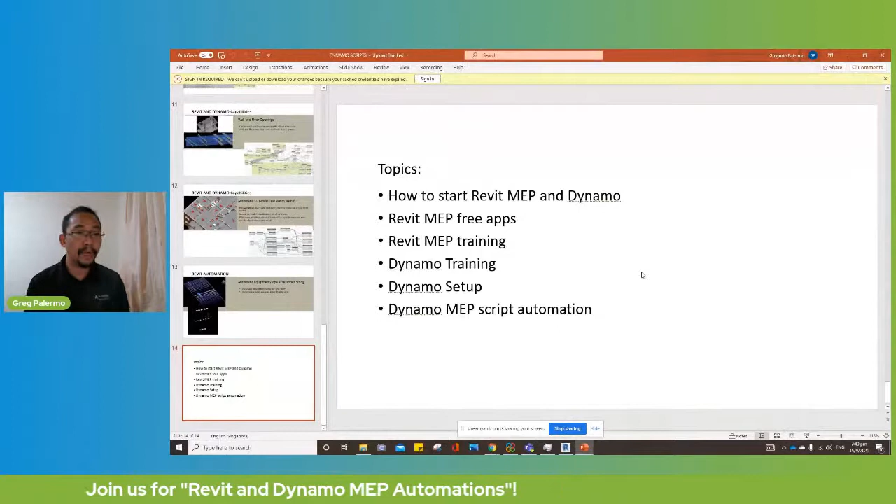Okay, the topics will be simple. How to start Revit MEP - how to start the training in Revit. So if you are new modelers or designers who want to learn about drafting and Revit or AutoCAD, we can cover this topic here on Revit MEP.

We'll also cover this - of course you must also master the families and templates. Then for Dynamo training also, this will be like LinkedIn - mostly all my trainings I mastered or watched through LinkedIn Learning.

Next topic will be Revit MEP free apps. So we have some free apps here, as you can see. This is my personal computer, it's not installed yet here, but I will show you all the free applications that we are using.

Next will be the Revit MEP training. For the trainings, you can use LinkedIn Learning. Most of the trainings I start there, but the training also will be on the work experience itself. So the more you use Revit and AutoCAD, the more you will gain knowledge and experience in this industry.

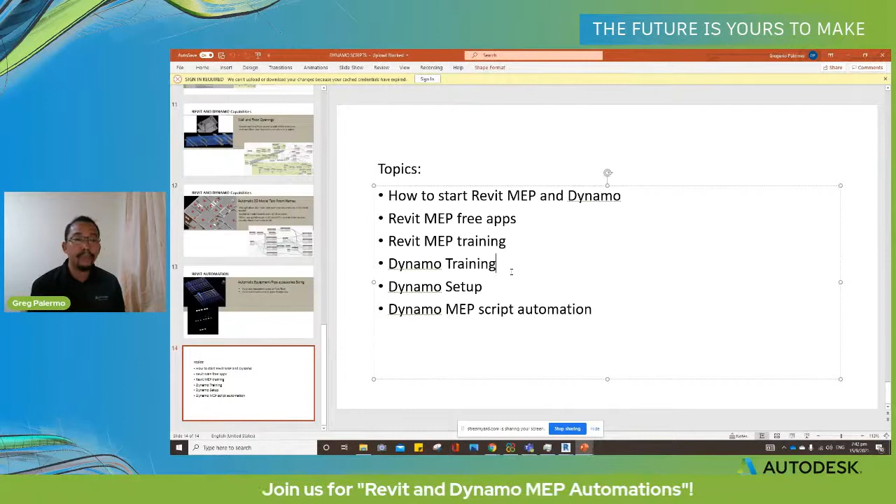Next will be Dynamo training. So how did I gain my skills or knowledge in Dynamo? Again, I go to LinkedIn Learning and finish all the courses there, all the Dynamo training. Then eventually I go to the Dynamo BIM site also to download all the scripting and integrate it into my process.

Next will be Dynamo setup. So how can you start with Dynamo? How you can install this one, then update and uninstall the older version. Also, you download the packages and settings for the manage node packages path. So this will be the course and the topic.

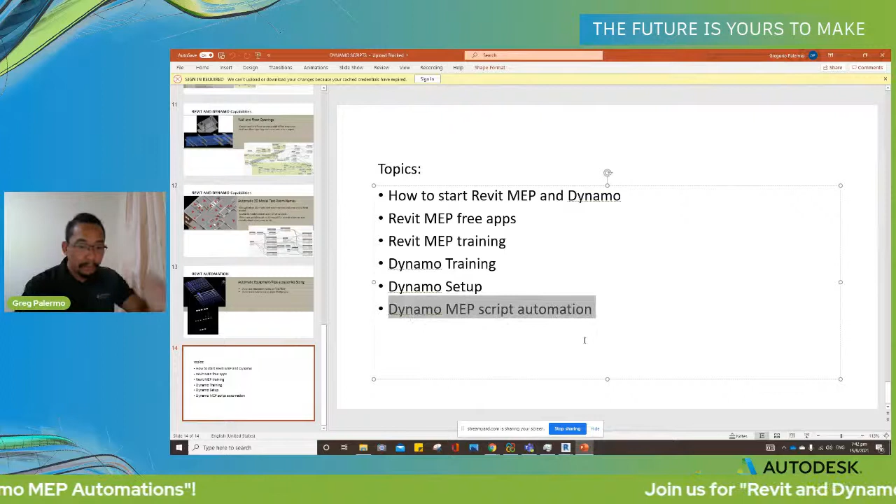Next, the last one will be Dynamo MEP scripting automations. So I guess I will show you the scripts here that I created, and some of it I already downloaded, copied, then checked and practiced, and eventually applied into my process.

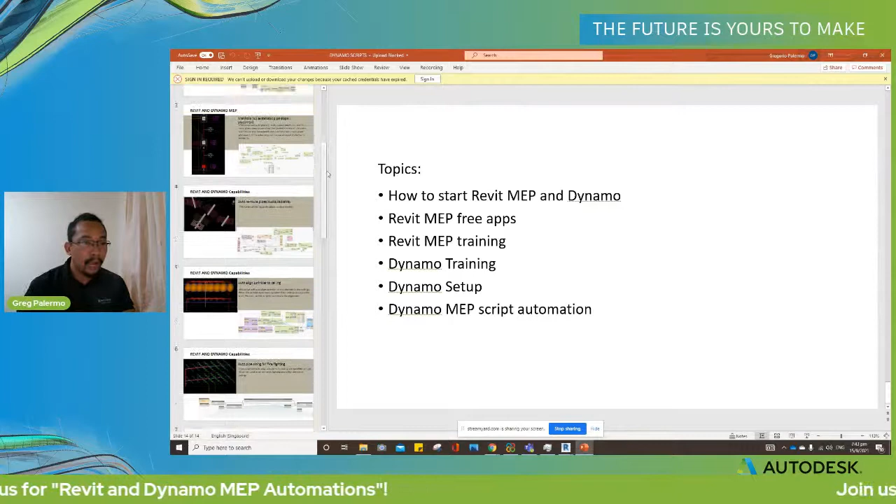So I will just show you this one. Let's start with these slides. These are the tools that I'm using. This is free - PyRevit, Rushforth also.

This one has a 1 month free trial in Revit, so you can download this one. You just type, for those who do not know yet, you can type here 'Revit apps', enter, okay, and go here, and then you can download all the applications here. So Rush Publisher, type here, like Rushforth. This one has a 1 month trial.

You can also try the roots here. This one is also free, no fee. It's free, you can download this one. We will cover this one later.

Then we have Microdesk also. I did not install this in my computer, but you can only install this one in the lower version like Revit 2018. You can install this application. What does it do? It will auto align pipes, especially slope pipes - it's a little tricky to align in 3D, but this one can align in Microdesk. It will also automate the creation of pipes in 3D, so you can create a pipe in whatever position in the 3D of the fittings. So this is mostly my used applications, free applications.

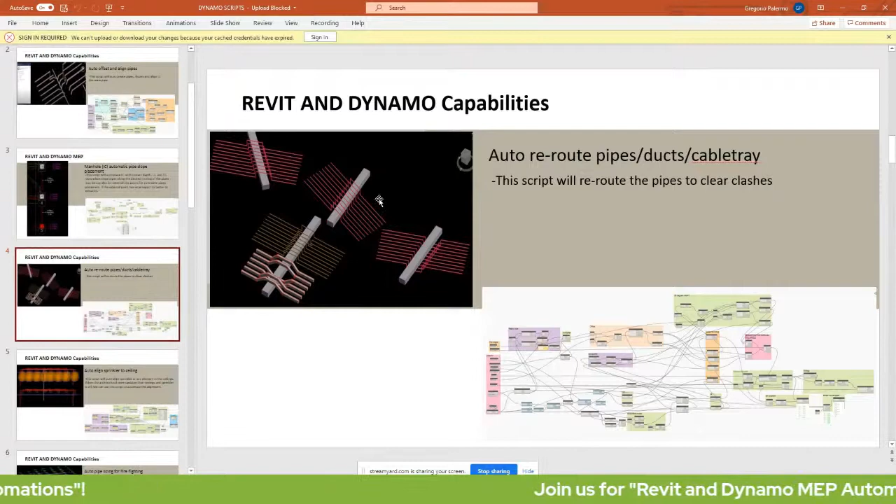Next will be auto align sprinkler to ceiling. So if you have multiple sprinklers, and the architectural changes the ceiling height - maybe in one room they have multiple ceilings - when you run this one, automatically the sprinkler will align to the ceiling.

So next, this one is my first Dynamo script that I created personally - automatic pipe sizing for fire fighting.

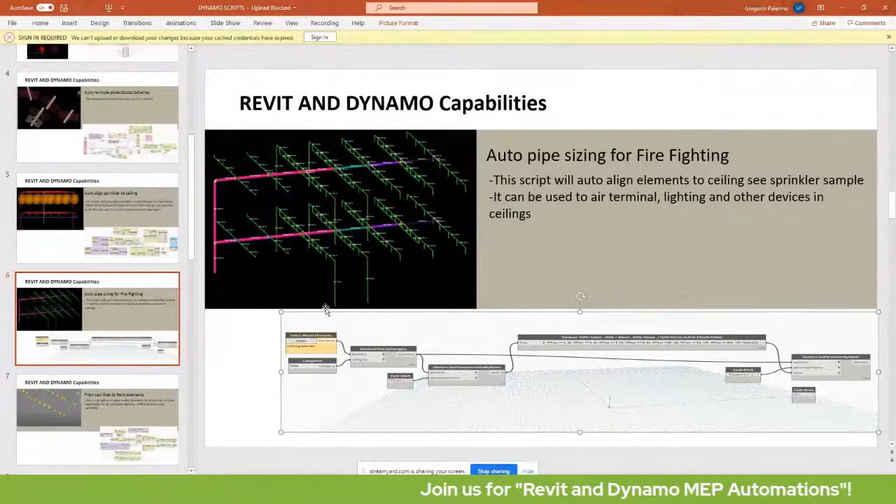This one will save time because normally once you place all the sprinklers, draw the pipe, all the branches and the main pipe, then you select each branch to size it in Revit. But with this script, no need to do that - you just run it. As you can see, the script is simple already, not complicated. I will give the script and a link, maybe in box.com, so you can practice and apply this directly into your project.

Next one - if you have points in AutoCAD, let's say already marked up from an old drawing, and they want to complete the drawing in Revit, this script will place all those elements in the ceiling. If you have the CAD points, the center point or line, it will convert those lines or points into an element that you decide in the project - sprinklers, air terminals, lightings, all those elements in the ceiling.

This one is for electrical also. The engineer asked me if we can auto-generate placement of wire size inside the cable tray. So let's say you draw a cable tray, then you have a number of wires to place there. Of course you have to select the parameter, so you can automate placement of all the wires inside the cable tray, whatever the size, how many wire sizes fit. In electrical, I'm not an expert, but there's minimum or maximum size per cable tray, per width and length.

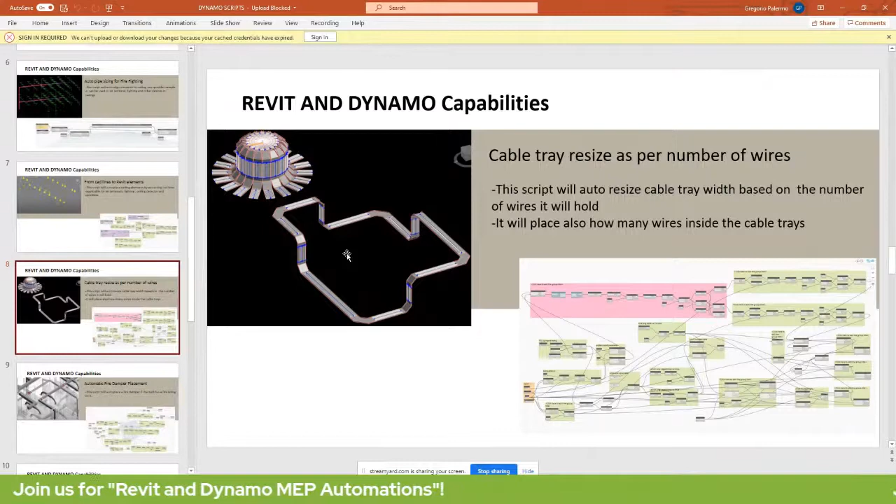This one I downloaded only from the Dynamo BIM site, so I can show you that website too. It's important that you know all those websites. So Dynamo BIM - I have it here. You just type here. This is important - I download and search all the scripts and integrate them into my process in MEP. So you just type here, let's say fire damper, and that's how you integrate and get free scripts already.

So this is the process I'm doing - fire damper, you just select here, maybe this one. Sometimes they have a script link for this. I don't know if it has a link - you download this one. I don't know, this is the family. So the script will sometimes be like this, then maybe you just screen capture and work in Dynamo, placing all this - you just copy it.

The way to master Dynamo, to learn it, is to practice it. Without practice, you just watch in, maybe LinkedIn Learning, all the Dynamo tutorials - you will not learn. You must open Dynamo and practice placing all those nodes. That's how I learned my experience, my skills in Dynamo.

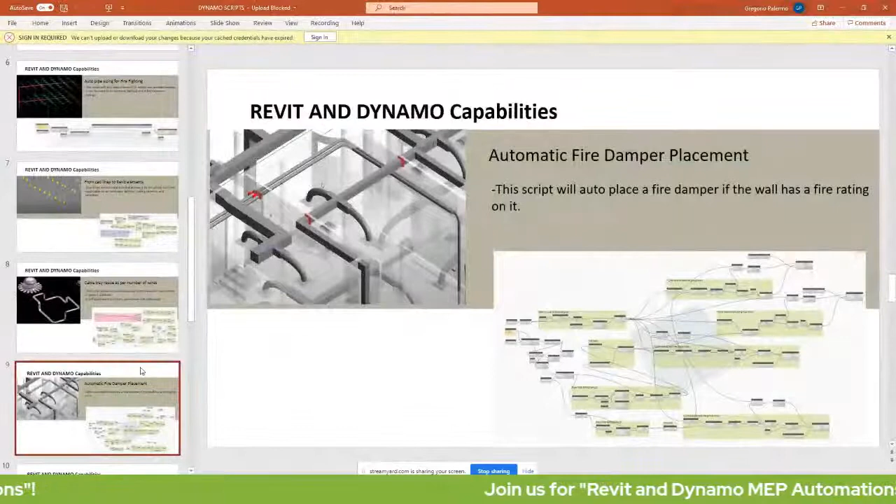Okay, go back to the topic. Let's finish this one - again for electrical, but I created this also. This process, let's say you have a dB and dP value. In Excel you have two columns - information of all the electrical circuits schedule. Let me zoom this one. Let's say in Revit you place already these two pieces of information - DB8 and DB6. You have already placed this.

In Excel, when you run this Dynamo automatically, you don't have to input all this information, SP, 10A, all that - it will auto-populate based on the matching of these two parameter information. We tried this already, it's working. I'm not sure if I'm clear, but if you have two parameter information that matches, the rest of the information in Excel will get that and place it into Revit. So it's like matching and then getting the rest of the information into Revit.

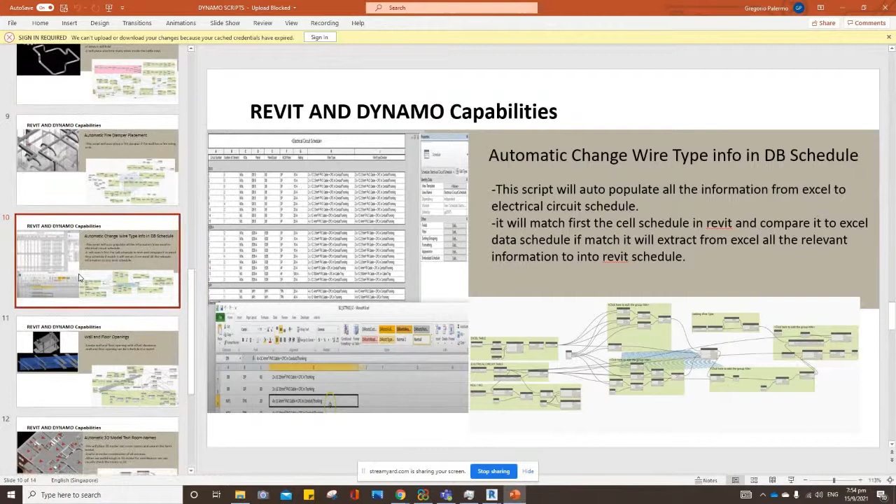Sometimes it's difficult to explain the whole process in Dynamo. Even if I'm already doing it, it's better to actually do it, to practice it, rather than to explain it - sometimes it's really difficult to explain.

Okay, next will be this one. I also downloaded and then updated and integrated all the parameters and information from the Dynamo BIM website. Then I created my own version of wall openings and floor openings.

The advantage of this one is that when you have a shared coordinate, it's not exactly center to center or origin to origin. Let's say your building architecture Revit model is slightly moved or in different coordinates, when you run the script, it will still go there and open the correct openings. Because I already tried the simple one I downloaded from the internet, and when the coordinates are moved or in a different position, the opening will not follow.

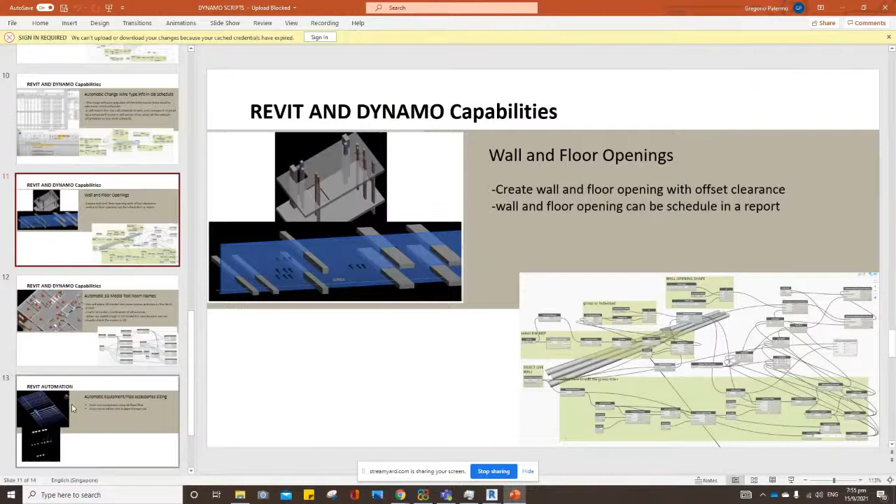So that's how you can improve or progress your script. Once you download the script, it's not finished already. There are times you encounter a problem, then you have to work on it, develop it, and eventually you reach a certain point where it's already okay and you can work with it.

So this one is basic, no? For Revit Dynamo automatic 3D model text room names. This one is an advantage in Navisworks. Let's say you want to walk in the room, it will not be in the normal process if there are no 3D text in the room, you cannot see what room that is.

You just check the manual, the PDF for that floor plan. But if you have a 3D room text, then you open it in Navisworks, you can see the room itself, placed in the floor and walls. So when you do a coordination meeting, you can see what room you are talking about as you walk through in Navisworks.

Okay, next, so this one is not Dynamo, this one is basic Revit. You can automate Revit sizing of equipment, air terminals, and let's say VAV or mechanical equipment like fan coil units. If you have the correct or perfect system flow in your project, then Revit, without using Dynamo, will auto size those equipment and air terminals. You just input the correct flow, then the air terminals and equipment will auto size. No need for Dynamo scripting for that. We will cover this one in the next topic.

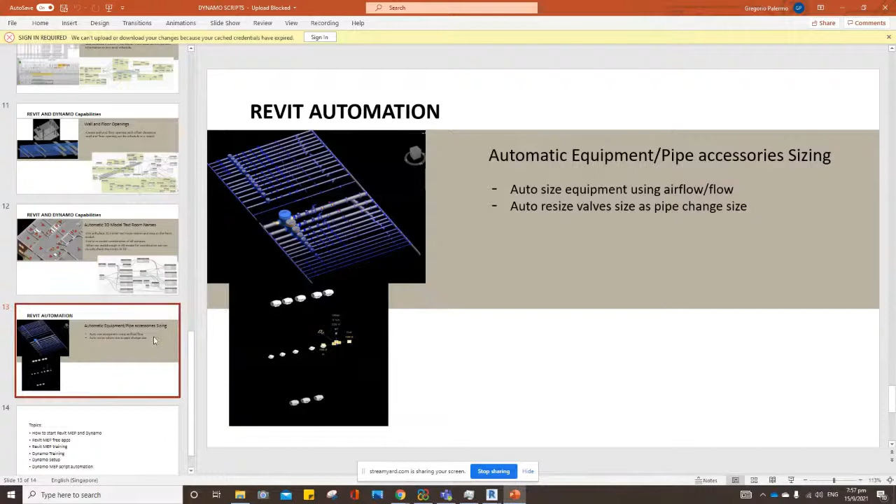Okay, so I guess I explained already the scripting. So let's go back here to how to start with Revit MEP and Dynamo. So far, any question?

To the... okay, let's continue.

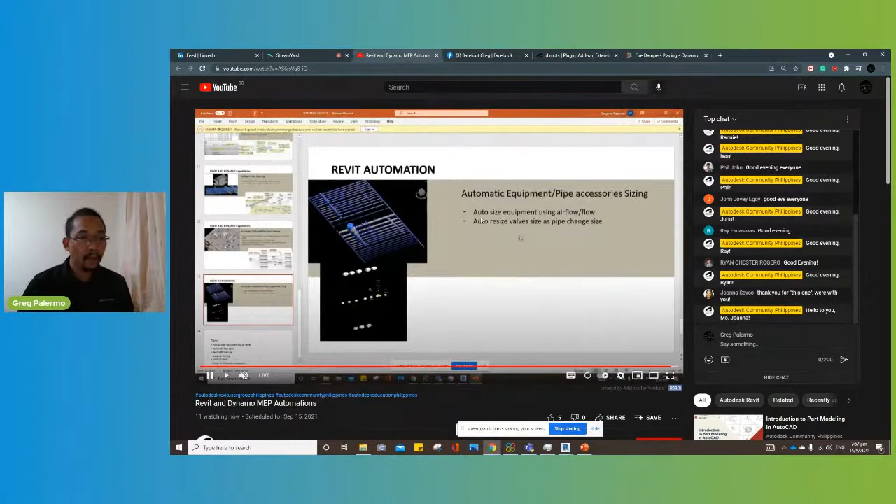Okay, so I will just open this one. How to start Revit, MEP, and Dynamo. Okay, let's go back here. So again, I guess we already have a LinkedIn profile or account, right?

So what I did, besides working in Revit modeling and AutoCAD, you must also start learning to gain more knowledge, because from my experience, only a handful of companies do trainings in Revit MEP. So if you want to learn or advance your skills without an expensive fee from a mentor or training site, you go to LinkedIn Learning to improve your Revit MEP skills and Dynamo also.

In Dynamo, in LinkedIn Learning, I think the subscription is more or less 1,200 pesos, or 25 Singapore dollars per month. That's why, before, when I started, my previous company was fortunate that they provided it, it was compulsory to take all those courses in Revit.

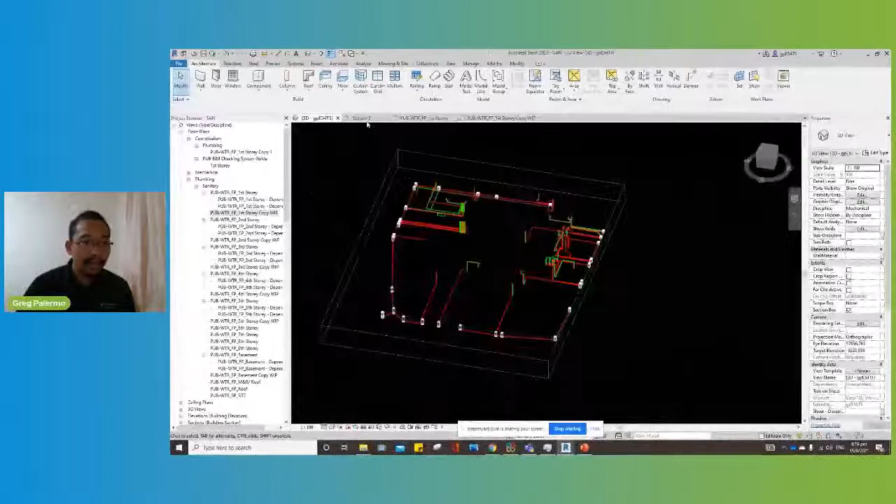Okay, so again, let's now start with the scripting. So Dynamo is not as simple - once you download it, you can already run directly, no. You need to set up also. You must have a template also, the correct template to be able to run Dynamo. So I will show you briefly my template and my families also.

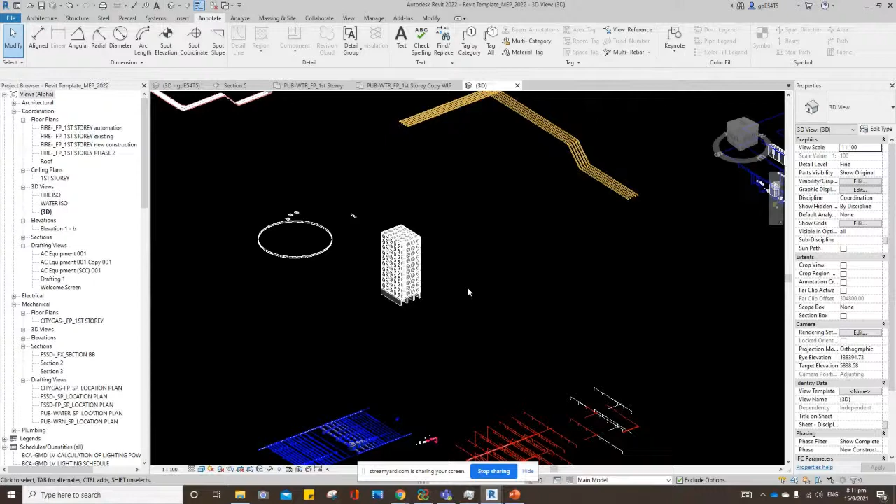So I have all these families here. What I mean is that if you have good families and templates already, then it will be faster for you to model your projects, and then you grab your families. So you don't have to check in the internet, download in the internet. If you have a good template, then it will be easier for you and the rest of the team to model. So I will show you quickly.

So my templates here, for example this one - if you don't have this one, then you do manual, all these bricks here in your template. I mean, this is GRP tank, all these styles. If you don't have the template or family, then you do it manually. It will take time.

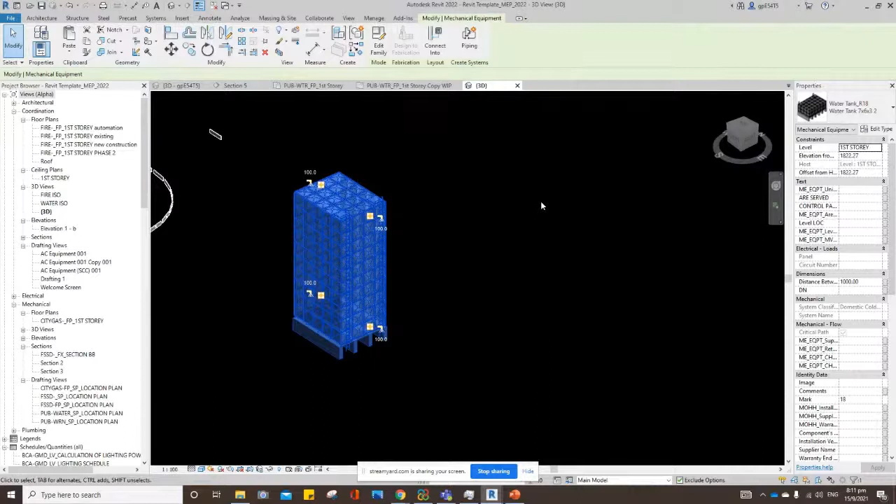Also the formula in this family is integrated also in Dynamo. So that's how I get those scripting, the formula from this family. I have a family - what's it called? Where are you? This one. This is my first family that I created, actually, this one with multiple connections at the back.

The formula here can be applied here, here, here, and also can be applied into this GRP tank. So, as I said, if you don't master the families, then it will be difficult for you to integrate that into Dynamo, because families, parameters, and Dynamo are integrated together. So if you lack all those three, then it's hard for you to run the script.

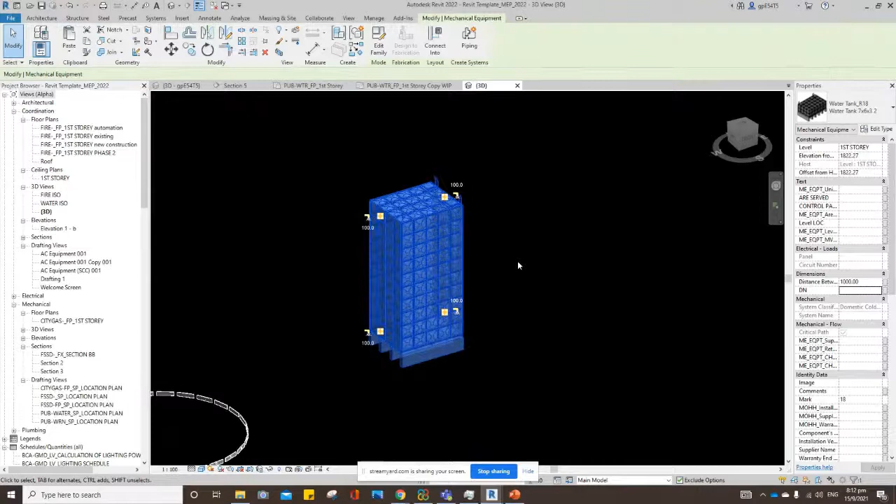So what I mean by that is this is an advanced family that I created. Let's say you want to change this one - let's say the width of the tank will be 2,000, length of the tank will be 4,000, and the height of the tank will be just 5,000, 5 meters.

See, it will automatically adjust based on the parameters or the formula that you created. So, length of the tank, I'll say 2,000, 5,000. Height of the tank, 3,000, 3 meters.

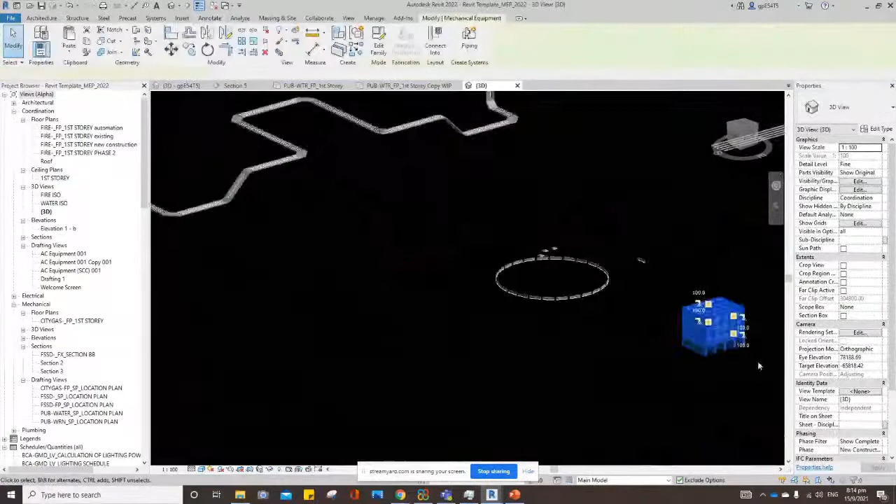Okay, so if you master this one, I can share this family. If you master the script, then it can be integrated also into the air terminal. So the concept of process in the air terminal, this one is the same - the formula that I created is more or less the same. So it started from here, then I can integrate into here.

So now I can create an array automatically. The family will expand, and all those slots will be attached also. It will auto calculate those slots. So let me show you my first script here - my family. This is a side slot linear diffuser, side connection. So I select this one. This is my first family that I mastered.

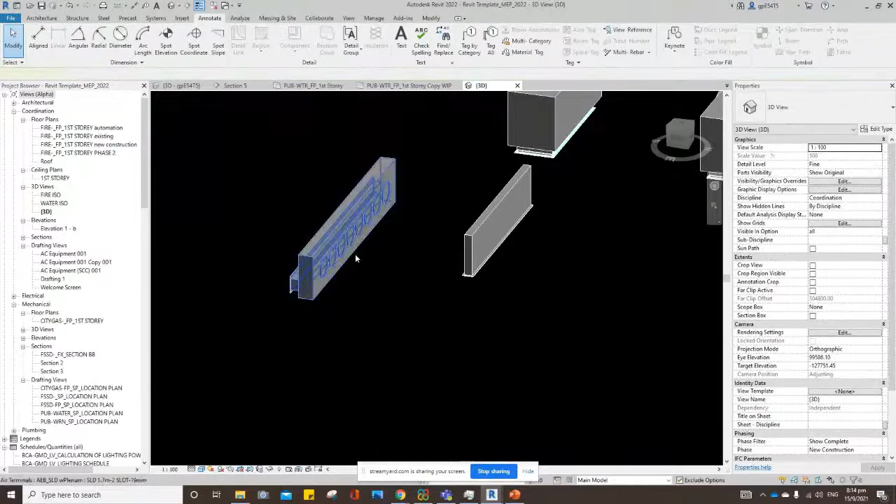So if we go here, if we change the number of connections, let's say 8, it will change also. And then the connector also changes to 8.

Anyway, I will share the family, but not the template because I'm using this one in my company. Another topic: how to customize families. This one is actually from Obayashi Corporation. You can download this one in bimobject.com. But the family I downloaded, the engineer told me that we use a different manufacturer, the Kyudo manufacturer, so it's different. So I customized this one.

So if you select this one now, and you want to change this to 2 slot, it will change to 2 slot. So it's a big help also to the rest of your team.

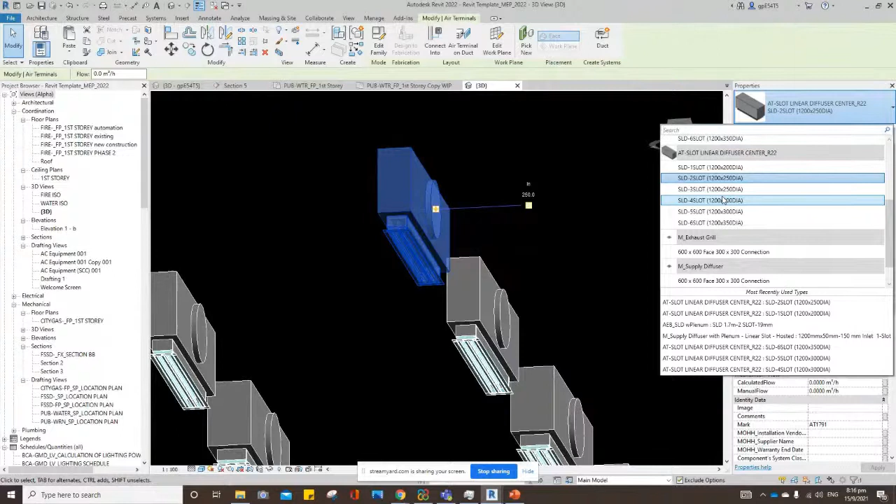If you know this and you are a team leader, you can support them quickly. You already have good families here if you can master and customize this one. So again, you can watch in LinkedIn Learning or YouTube how to create families for this.

So it started from here. Now I can customize most of the families and create those arrays inside here. Sometimes it's already completed from the manufacturer and uploaded on the internet, then you have to customize it to suit your preference or what you want. So that's how you can customize and edit families.

So any questions of families? Anyone? Questions? Nancy, can you see if they have questions there for the families? No, no question. No questions, huh? Okay.

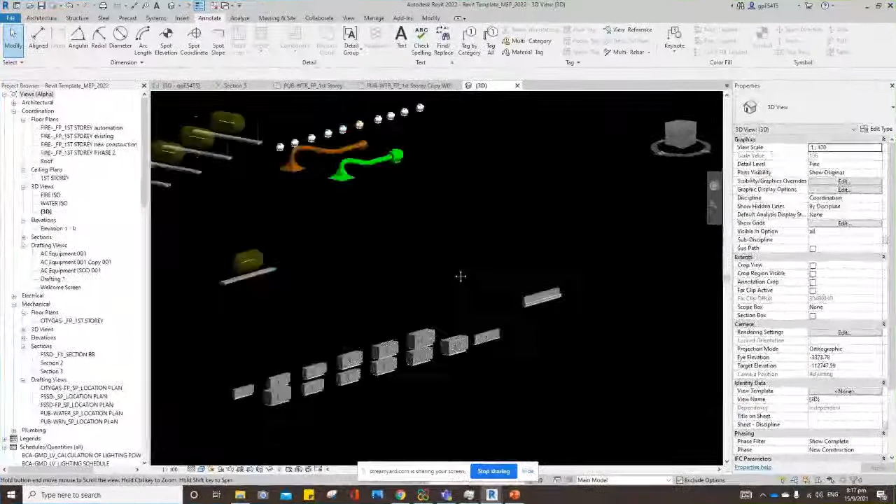Okay, so next one, this will be the automations. We'll cover this quickly. This one is the automation without using Dynamo. So this fan will auto size based on the airflow.

So if I change my airflow here, let's say 200, it will change also. No need to automate manually. So if you can apply the formula here, these dimensions here, you can apply also in the air terminals.

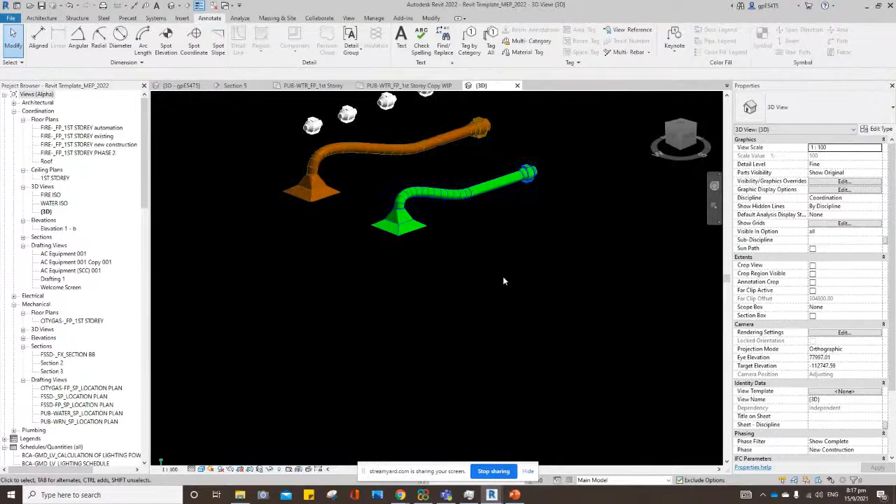So that's how you can take advantage of your automations in Revit only, without the use of Dynamo. So if I select again this one, let's say 400, it will change. Also, let's say I want to change this to 600, it will change also.

So if you can apply this in equipment, you can apply it in air terminals. I will quickly open this one. Actually it's already here, equipment fans, this one. So this one is the lookup table.

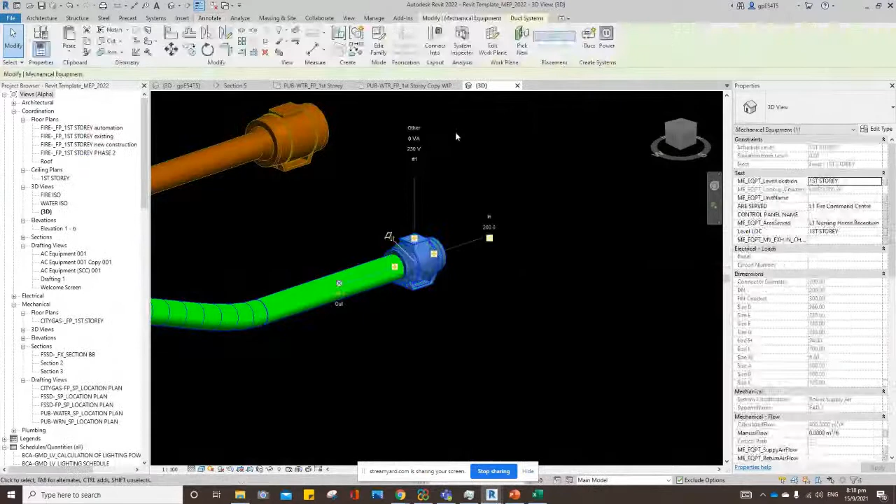So if you have this information, we can automate the sizing of the fans, equipment, FCU, air terminals based on the flow. So this is the lookup table, and if you go back to the family, I can edit this one. Okay, this is the family, I'll just maximize this quickly.

So this is the formula here, and then the lookup table here, this is the one. You just import that, and then maybe you change some of these sizes here. So let's say put the size D, as already mentioned in the Excel lookup table D, then what's already here? Where is it, A B C D, this one, length.

Okay, so in Revit, working in Revit and Dynamo all together is integrated. Its parameters are integrated, you can just link it and get all that information together, and then create a formula.

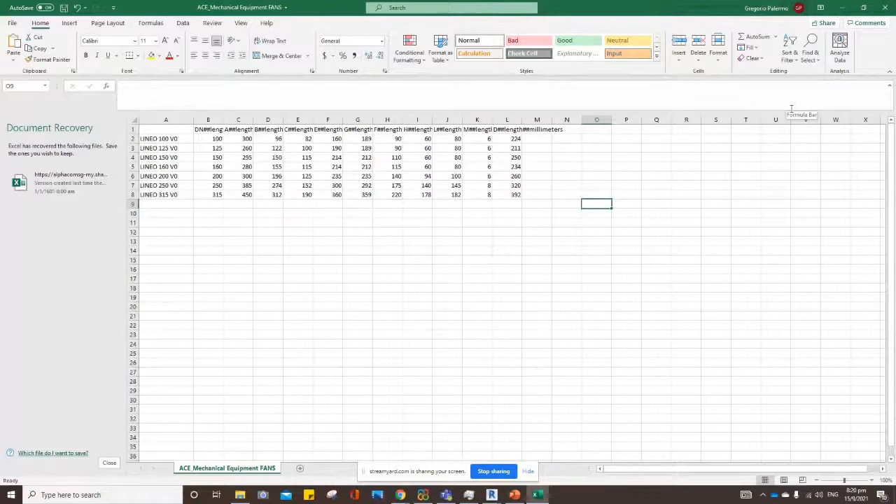So this one also I did not create. I've seen this one in a YouTube tutorial, then I was able to get the family. Then from there I customized it, integrated my process, what I want for this family using a lookup table. So that's how you also integrate that process and automate in Revit for family creation. Okay, I think we're finished with the families.

So no more questions, right? Continue to Dynamo. Yeah, okay, we have... what's the question? I cannot see it. Can you see it?

When creating MEP families, do you prefer to create them as hosted or work plane based or non-hosted? Yes, that's a good question.

For air terminals, I use face based. But for the other type, let's say mechanical equipment, it depends on you. Mechanical equipment will be just a typical generic family. The good thing about generic family is you can select the family and then input the level parameter and the offset, right?

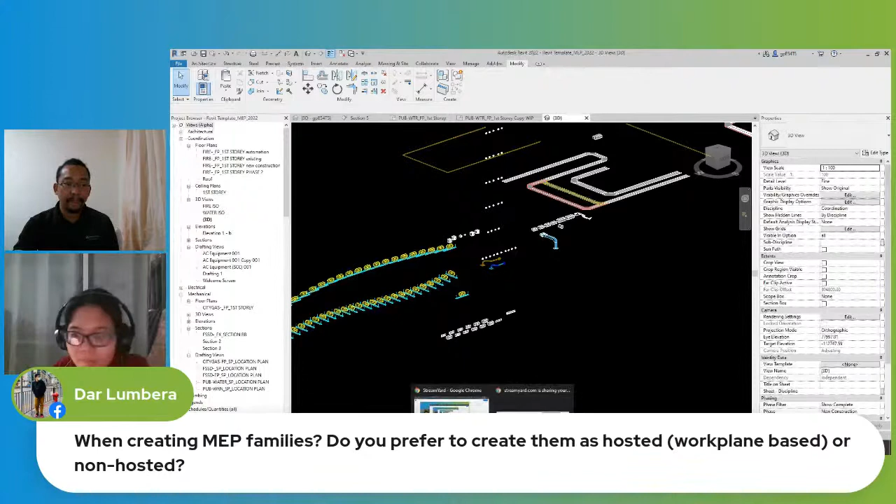Does that family also have a 2D representation? Yes, of course. I downloaded this one as a generic family, then customized it myself. Let's say this one is generic, so you can customize it. I also customized some of the arrows.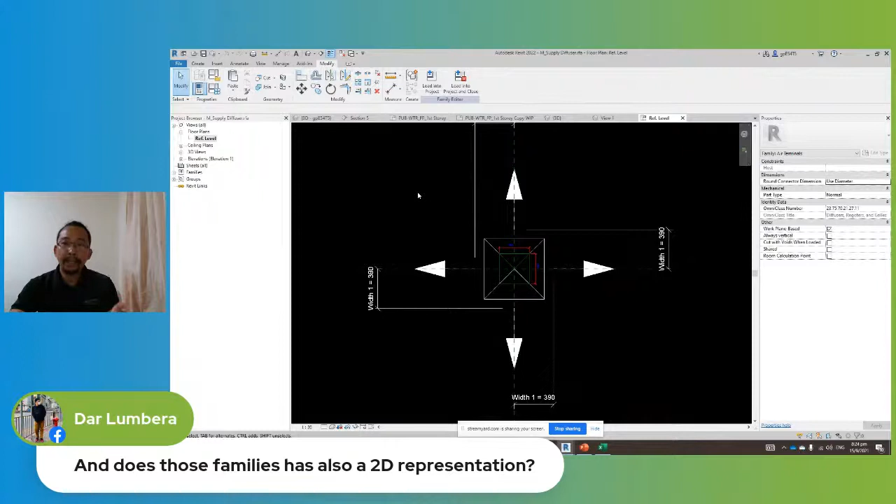The only thing you must do to integrate it into automations is master this duct connector here. It's important to know which one is in, out, calculated, and preset.

So anyway, I'll share quickly. For the air terminals, you should set it to preset because you're going to input all the information, let's say all the flow. This will control the flow from the air terminal to the flexible duct, then to the ducts, and then to the VAV. Now the fans will be a different story.

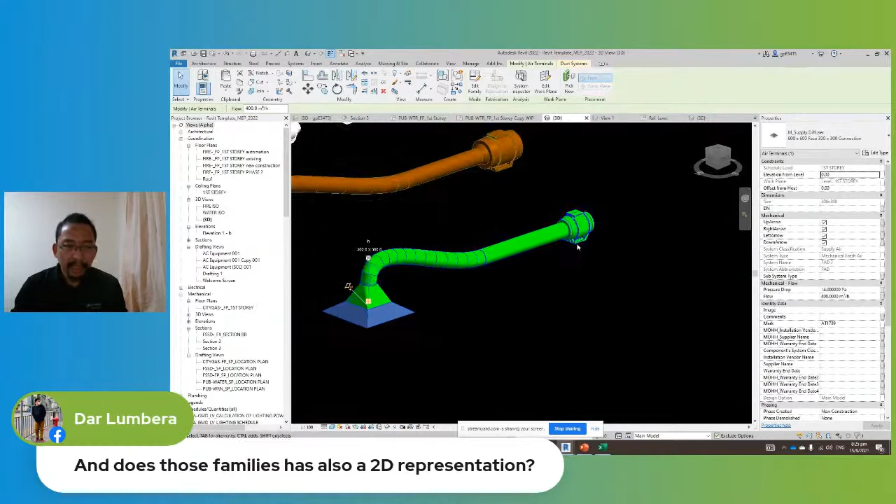If this one is in, this one should be out, because this one is pushing air to the room, that's why this one is in to the room. Exhaust is different. Oh, how come this one is in? This should be out in the room. I did not modify this exhaust family.

Wait, if this one is exhaust, no, this is still supply, not exhaust, sorry. Anyway, for exhaust it's a different story: this one here should be out, and then this one here is in, because you're going to suck air from the room to the air terminal exhaust, to the ducts. That's why this one should be out in exhaust. So you master that too, so it reads the correct airflow here.

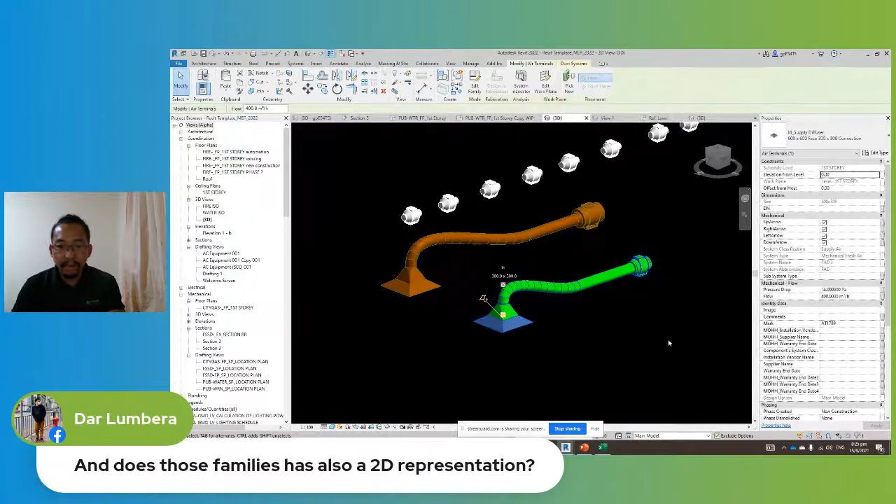As you can see here, 400, because you placed 400 flow here. This one is 400, and the flexible duct at 400 also, the duct too. So that's how, if you have the perfect system, you can control it in Dynamo.

I'll show you the process after this, the two processes in the mechanical ducting system and also in the sprinkler. The concept is the same, but they are different disciplines. In Dynamo, if you master one concept, you can apply it to multiple disciplines as long as they have the same process or parameter to extract. I hope I was clear with that. Any more questions before we proceed?

Yasi asks: how does Dynamo help work with Revit families?

Oh, what do you mean? With Revit, I think the question is, because Dynamo will just save time for you. If you set up the families correctly, then you can run a Dynamo script that is repetitive in process.

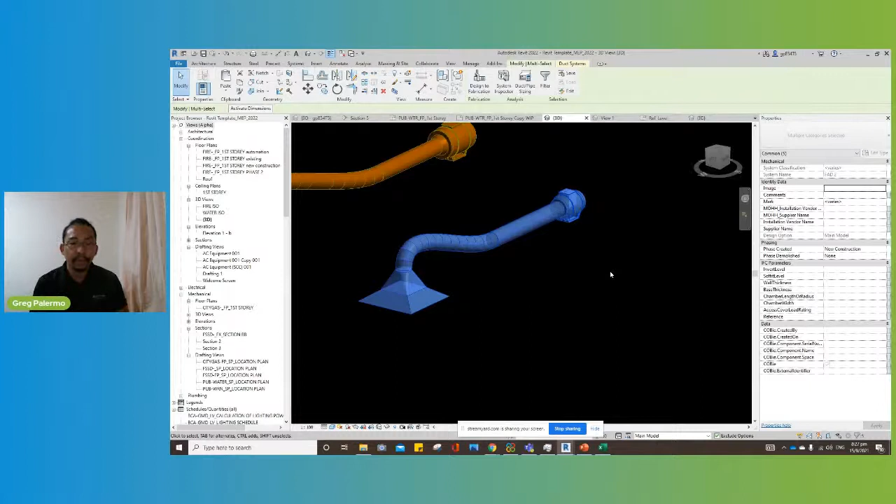Let's say you place a pipe, place an air terminal here, place a flexible duct, and then also connect the duct here. That's three processes already. But if you have Dynamo, you can just select all three and run Dynamo, and it will resize the ducts, the flexible duct, and also the type.

You can also select the type of air terminal. Let's say type 1 will be 150 by 150, type 2 will be 200 by 200. You can automate that too, no need to select one by one. You select this one and then select the type here, maybe you have multiple types of families. So Dynamo can save time.

I think for me that's the best way to describe Dynamo, it saves time for me, I don't have to work overtime. If my teammates, the engineer, or the project engineer ask why I'm not working overtime, I say I've already done all the automation, what do you want me to do? You extend the time, okay, I can work overtime maybe, but it will take longer.

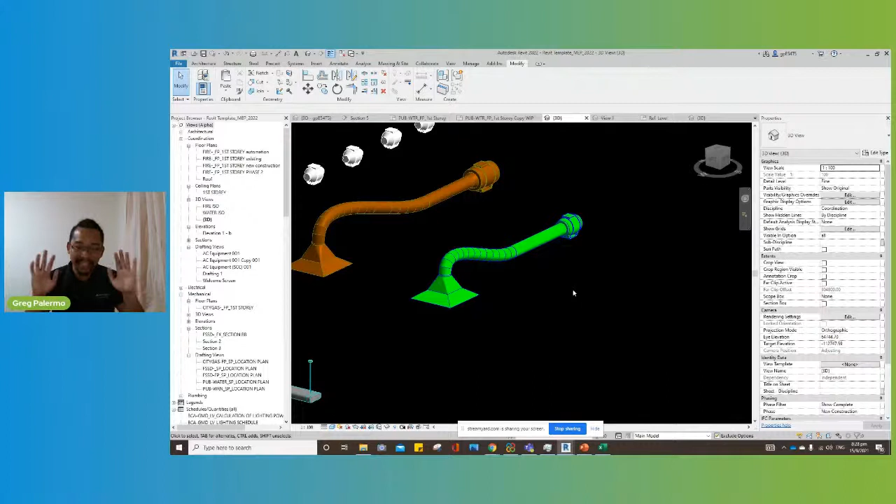I will not use Dynamo for that, but you can use it if you want. You're already doing automations, saving more time on the project and adding value to the company. So why work overtime when you can save that time? You can have more time for yourself to learn, maybe pursue your hobbies, rather than extending working hours doing the same process without automation. So it will really save you, not just the company. It will help you personally.

Okay, any more questions before we proceed to the Dynamo scripting? No question? Okay, so I think we go here at the fire sprinkler automations.

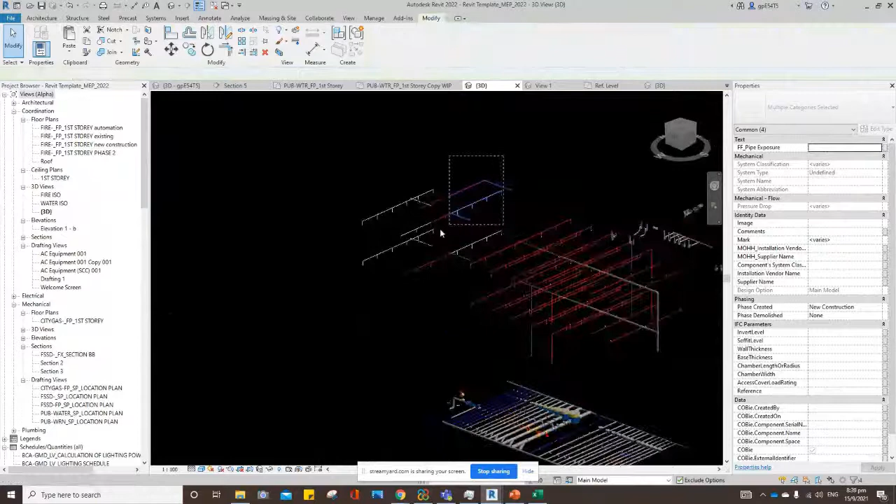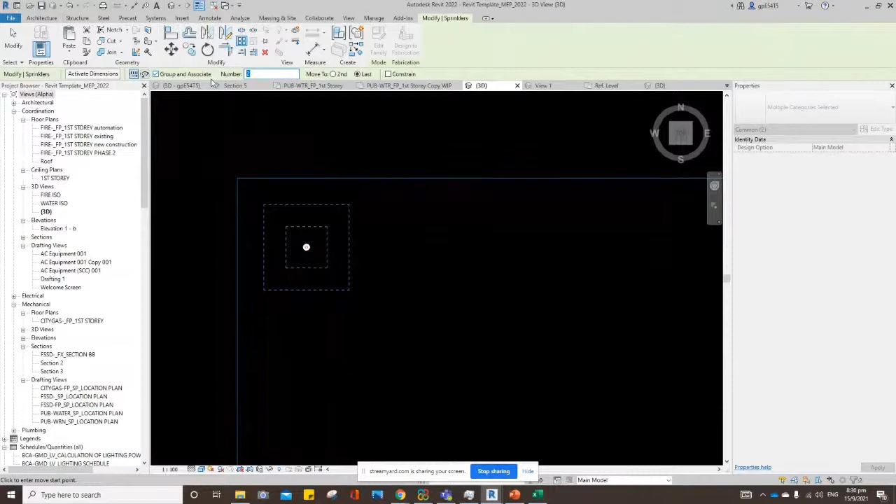Let me copy this one. So now we're going to automate the sprinkler. Let's just place the first story at 2,500. Okay, so usually in sprinkler type here, array spacing 20 and 3,000 or 2,500, depends. I'll put 3,000 here.

Okay, again, ungroup this one. Second, so 3,000 - sorry, I made a mistake. So that's the 3 meter distance you want. Okay, then of course you want to draw a pipe here. Let's try this one.

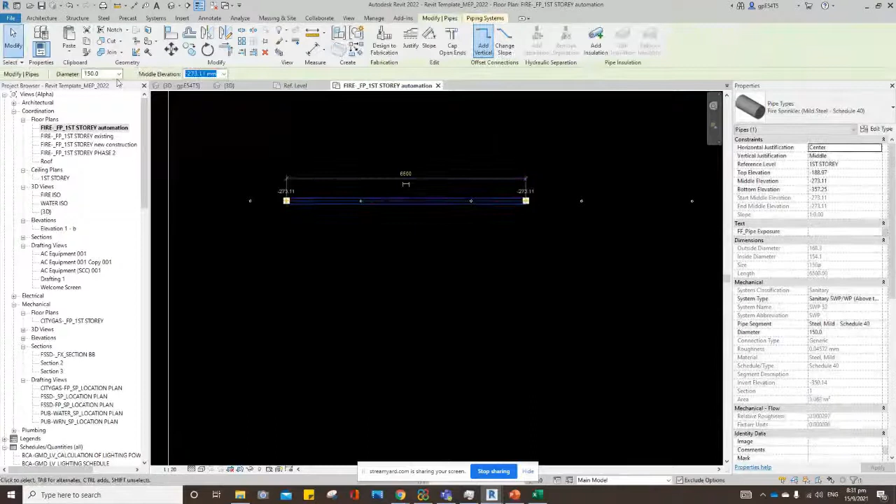Put this one to 25. So I'm showing you the basic process, how long it takes to place sprinklers here.

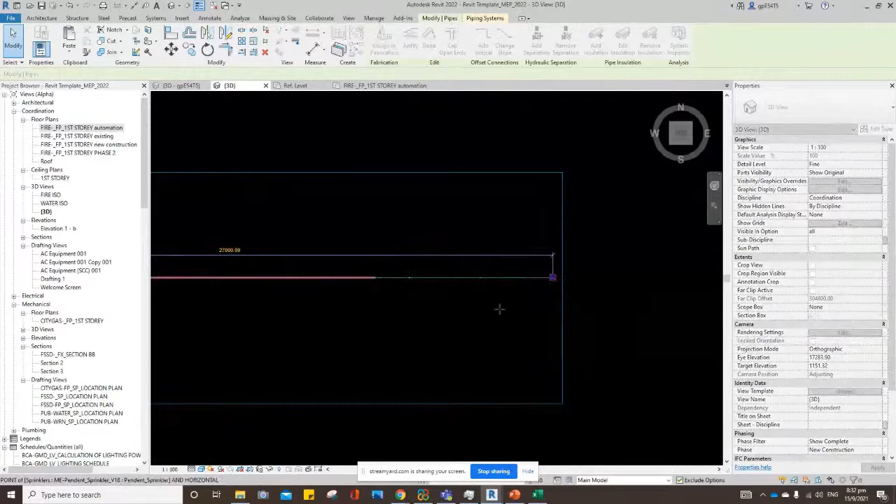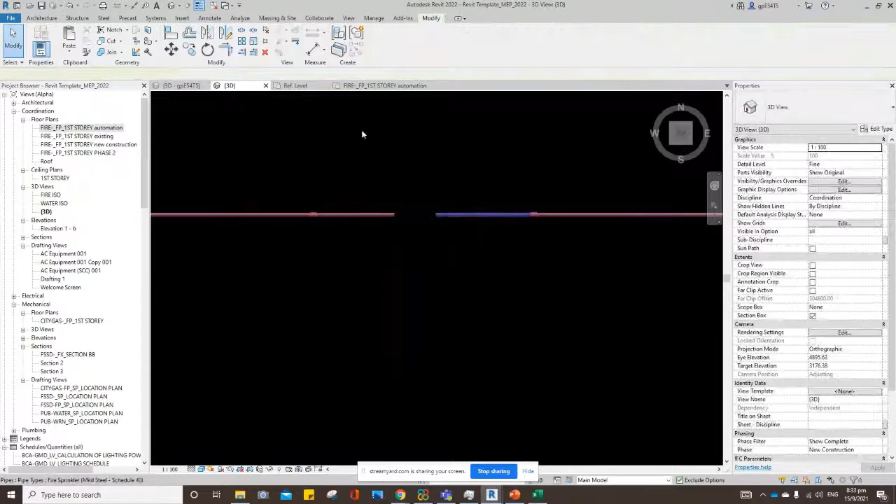So this is the normal process in working in Revit. So you place here, just finish this one. So check this one, okay. Then we're going to split this one. So I will not draw the riser nipple.

So if you check now, this one already has a flow here. You see, the flow concept is the same as mechanical ducting - you have a flow, so one sprinkler will be one flow. This one I create a place here, flow of one. So now for this pipe, it has 2 sprinklers. For this pipe, it has now 3 sprinklers. So that's how you actually size and design the sprinkler system.

So you select this one - let's say 3 will be 25. That's normally for NFPA. Then here will be 32, and so on.

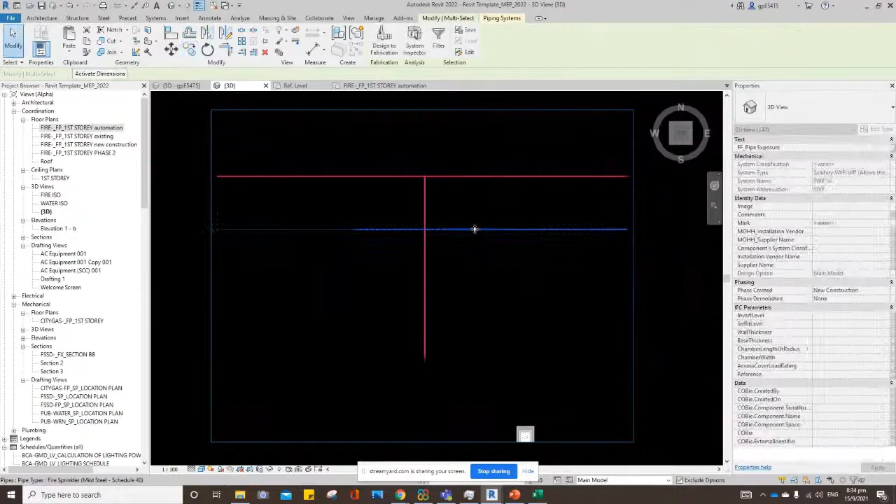Okay, so imagine you have a big project - you do that one by one. Even if you copy this one, copy here, maybe for the basement you have uniform coverage, but inside the room it's complicated. It's not that simple to draw the pipes and sprinkler coverage. So I will just draw a simple one here.

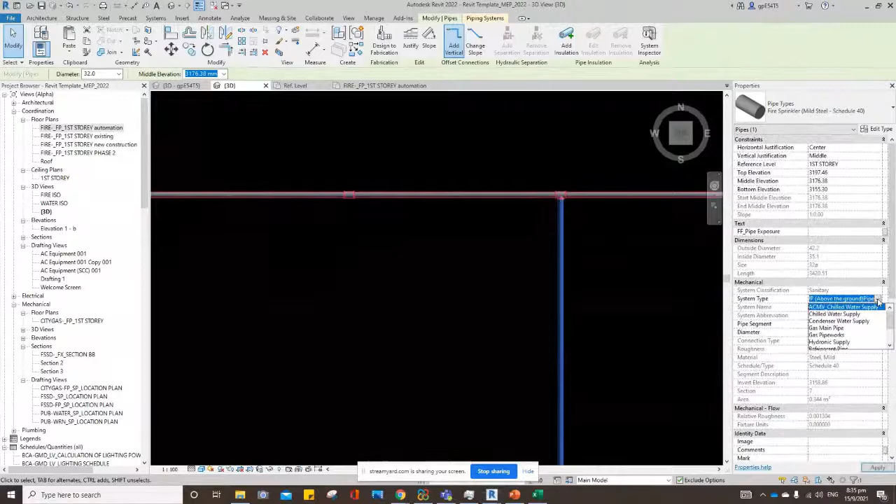This one will be the size, this one. Where's the blue? Sorry, I get it now. So place this one in the chilled water supply. Okay, so to be able to show the flow here, this pipe will be 20 now. As you can see, the flow will be 20.

So make sure that you choose the chilled water, do not choose the system here. Let's see what's the... usually for the piping here, it's either wet or dry, but do not use that system. You use this one, chilled water, but I already renamed this one here.

So the main here, I already Dynamo'd. But you see the system classification - it's hydronic supply to be able to show the flow, because if you don't use the hydronic supply, it will not have a flow calculation here.

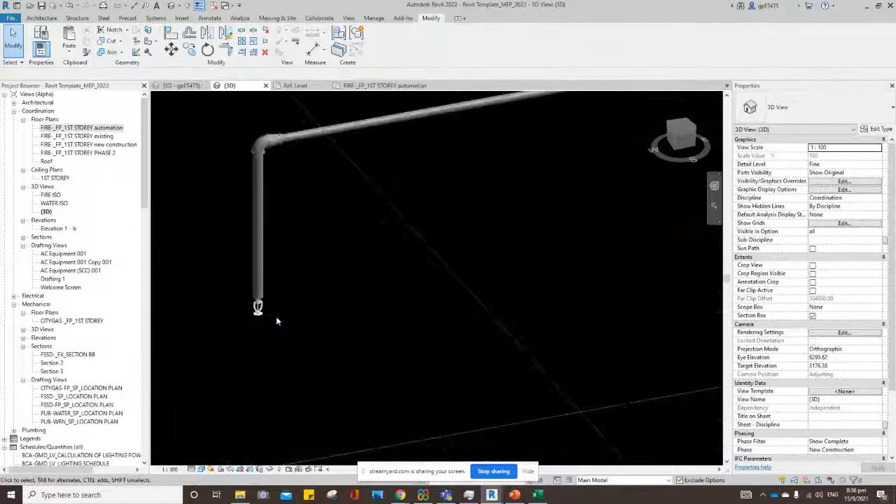Okay, the loss method will be not defined. Then the system will be hydronic supply to be able to show the flow, because if you show fire protection wet here, it will not calculate the flow when you load that in the project. Let's try this one - we will load this one to the template.

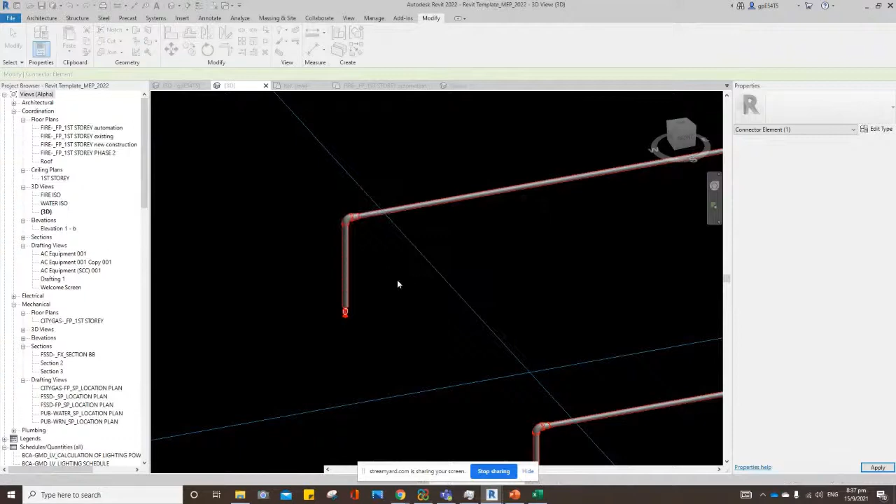So it's disconnected from the system now, there's no more flow here. Let's say wet riser - no more flow, you cannot see the flow here. That's why you must set it to hydronic supply, this one.

Okay, so if you check the system here, how did I make it, or how was it created? Sprinkler main pipe - you go here at the families, pipe system. Where's the pipe system? This one, okay - in here you have hydronic supply, right? You just duplicate this one and then rename it sprinkler pipes or sprinkler system.

So if I create this one and change the system here, it will still show the flow, the number of sprinklers. This one - if I select that one, sprinkler system - so even though the color changed, the flow is still there. So that's the trick on how to automate this one in Dynamo.

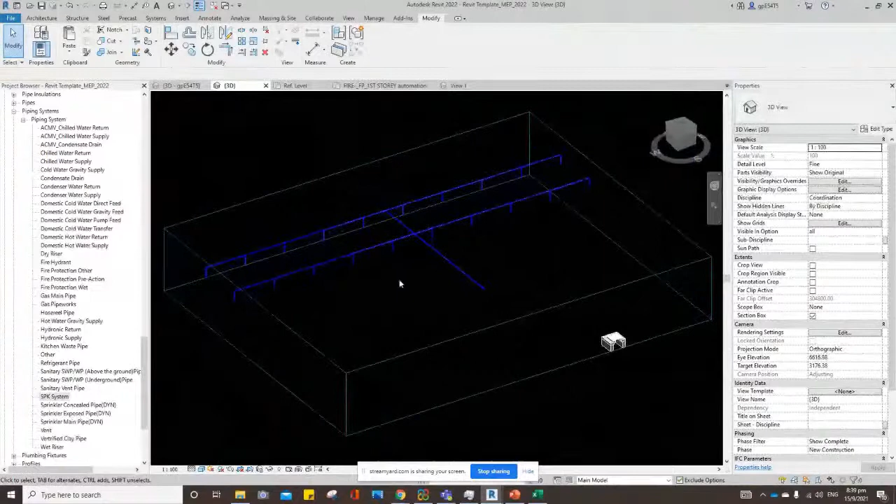Okay, so I think we've set up the pipe sprinkler correctly. I'll just put this one in the Dynamo color. Now we go to the scripting now - so automation, this one. Okay, I will just tag this one to show the sizing later.

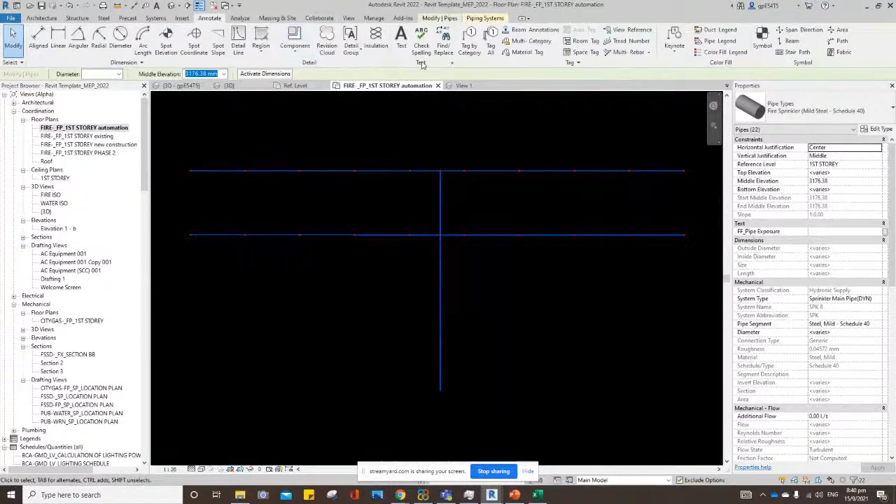Pipe tag, if tag, this one. Okay, so I may maximize this one to 100. I place here the flow also, so 25, 25, then the flow. So 2, 3. As I've said, if you have the perfect system, you can automate anything.

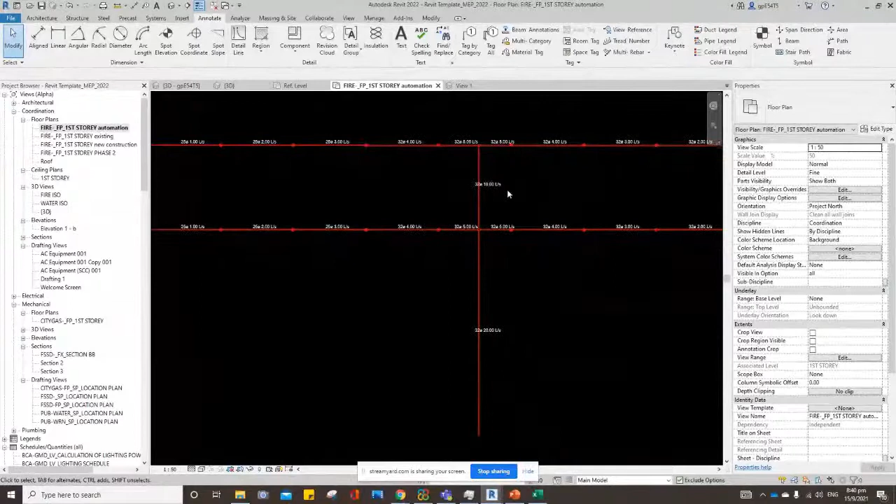Okay, so I guess we're ready now to size this one in Dynamo. I mean yes, correct, so I'll close this one. So it's all 25, right? Now we go to Dynamo.

This one here, so we firefighting pipe sizing. This one, if this one is already created, then for you, no need for you to recreate this one. You can download this one, save in your computer, and then just click and drag and select.

That's it, it will complete and auto size the family. So of course, for this one, this is the node that will select the elements or the pipes. Then we will filter that one with all sprinkler only. So I will type here sprinkler categories, so it just type sprinklers.

Okay, so filter all the sprinklers, and then... I think I made a mistake. Pipes, we're not selecting the pipes. We're going to change the pipes. Okay, so these ones will be pipes.

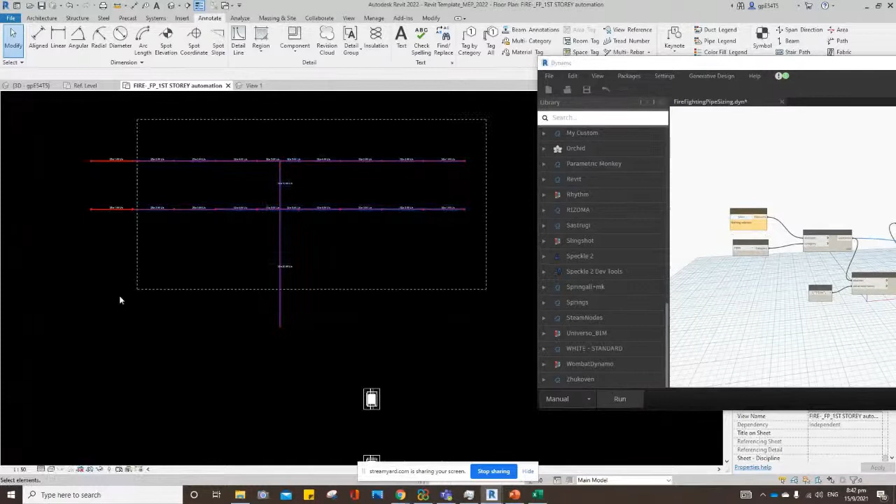Okay, now this one will get the flow of all those pipes. So I will just freeze this one, and then select now all the piping here. So it doesn't matter if you select the sprinkler, the tags, the fittings, it will filter only the pipes and push through to these filter nodes.

Okay, so if I run this one now, completed now, so you will have all the information here. So you see, you have all the pipes that have a flow of 1, 2, 3, 4. So this one, this pipe, because this is 20, the largest pipe, it will be the largest pipe.

Okay, then after that, so we go here. This is now the formula that I created. This formula is in the Revit also, Revit families I created before, and then I integrated here. I place here, actually this formula is if-statement formula, this one. Sorry, this one. Formula, this one.

So you just type all the nodes you want here. Let's say select elements, right click, select elements. It will show here elements, all the nodes here. So that's how you also do the selecting of the nodes.

Okay, so after all the flow here, I'm creating the formula that if the flow is less than or equal to 3, the size will be 32. So this standard is Singapore standard we're using here. So it depends on the country.

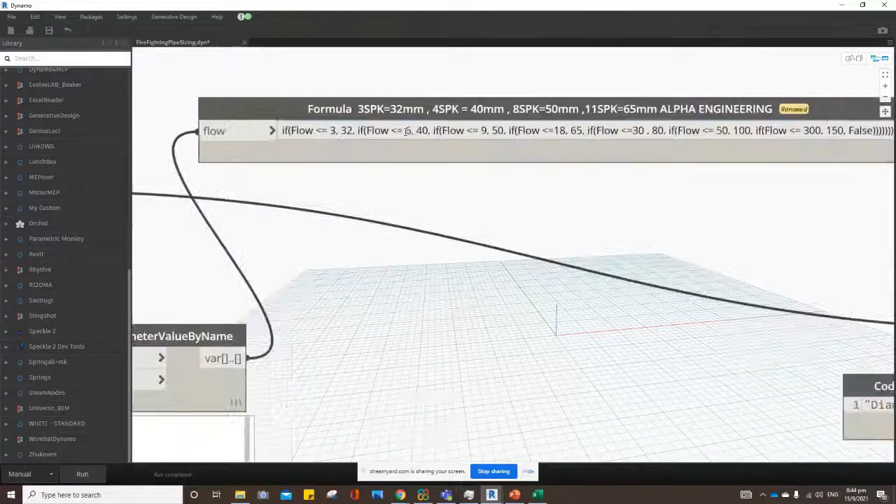In Qatar, when I'm working there, the sizing will be less than 3 will be 25. So that's the sizing. But in Singapore it will be 32. Less than or equal to 3, 32. Less than or equal to 6 will be 40, and so on.

And then after that, you feed that one into the set parameter, this one. So I will unfreeze this one. Of course you select also the diameter here, this one, this is the diameter parameter of the pipe. Okay, and then this will be the value.

So if I minimize this one, okay, right, and then I will maybe maximize, make it bigger. So it will now change all this 25 and all these pipes here. So when I run this one, it will now update. See the piping here? It's already changed.

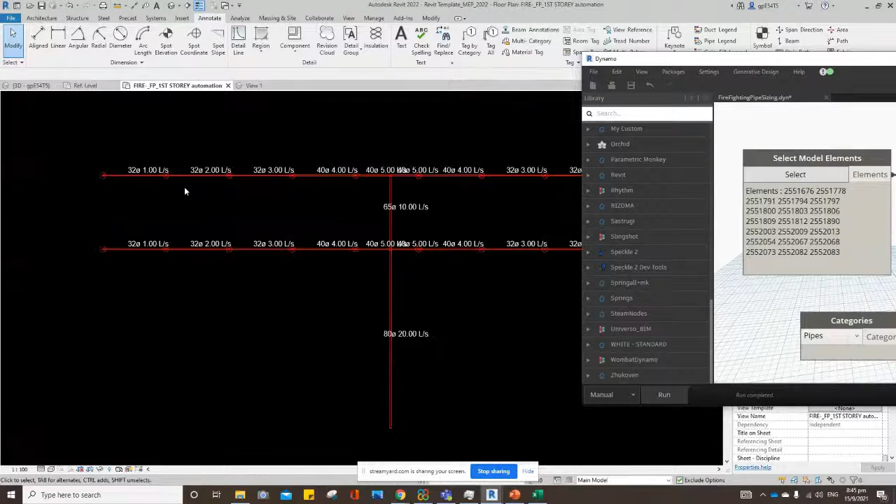So that's how you will save time, and create more time for yourself to learn, additional time. If you are working in sprinkler before, I'm working also the normal process. It will take time, and I'm always behind because the sprinkler pipe is not the priority, because it's small pipe, it's cheaper, but the ducting is the priority, electrical priority. So my piping, before, working in fire protections, I always finish last because I have to adjust my piping to avoid all those ducting, cable trays.

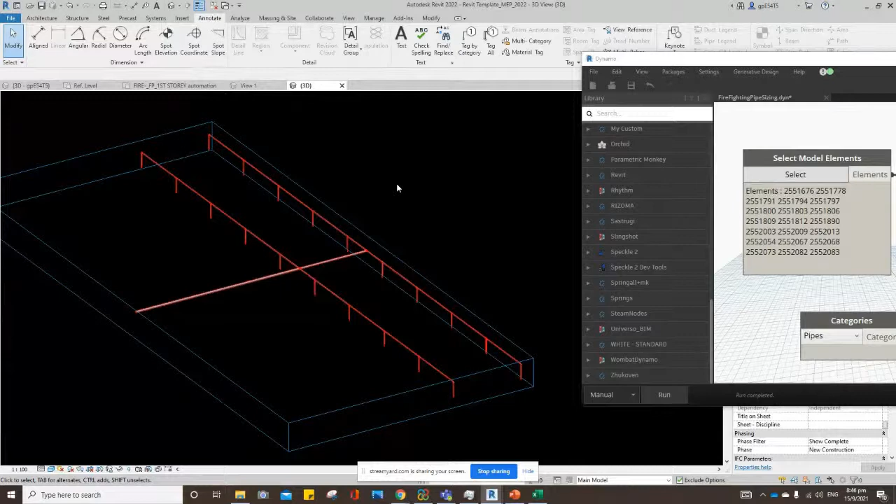So it will take time for me. But if you have automations, then for the coordination you have more time because you save already time in what you call this, in automating the pipe sizing here. Before, you select one by one, then you resize here, then you select this one, resize, select this one. Then what happened if the room is changed? So it's very tiring, it's boring, you change again, redesign again. So that's why it's very useful to use Dynamo to your advantage.

This one. Okay, so I think we have more time, so I will open the AC first. I think it will take time to open this one. Yeah, it will take time.

Ooh, sprinkler. Okay, I think we skip this one. Sorry, I cannot skip this one because it will crash. Teka.

It just crashed now. So anyway, I will open again the Revit. While opening, any questions, Nancy? While opening the Revit, it's just crashed.

One of the tedious or repetitive works when it comes to MEP is 2D production, such as combined services drawings, combined builders works, and ISDs. It could be creating openings, creating and arranging tagging and annotations, and inserting into sheets. What are the things that Dynamo could do to help me efficiently produce my drawings?

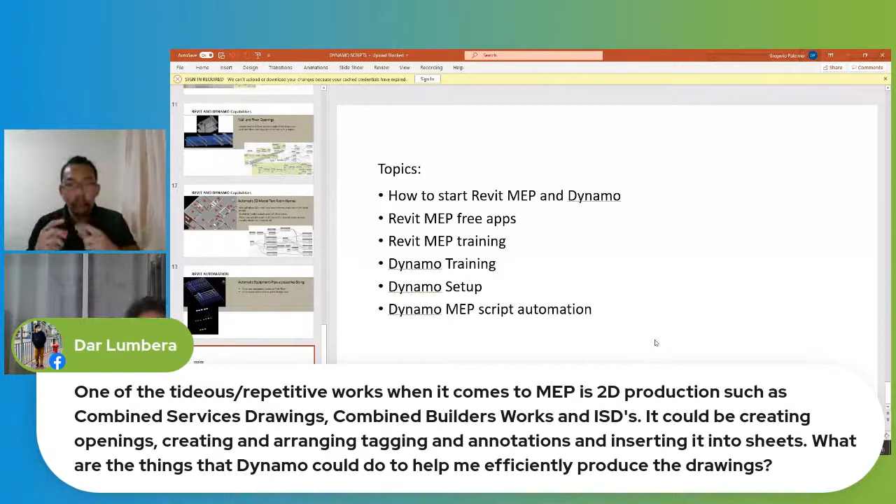Yes, correct. So the question, because that's one is for the contractor side. Luckily for me, I'm in consulting, but actually all the scripting, automatic wall openings, floor openings is already in the BIM site here. Where is it? I will just open this one.

Dynamo forums. Actually, once you start learning Dynamo, you just go here, download all the topics you want. Example here, I think I already posted here. Say, wall openings.

So it's already here. All the script, you open it, and then you customize it for yourself. All the tagging, so I've seen already. You can actually automate the tagging also, the taggings, the wall openings, like that.

So for the construction side, if let's say I will go there, I mean I work in the construction sites, I don't worry. I can still automate because I already have the basic.

Then when you encounter the repetitive process or task, then you already started learning Dynamo. Then you incorporate Dynamo into that repetitive task that you want, so you create your own script for that one. Because I think the best experience is the one who is working with it.

But for me, I cannot create the script for you. I think if you are experiencing it, it's best to learn and to improve by creating it yourself.

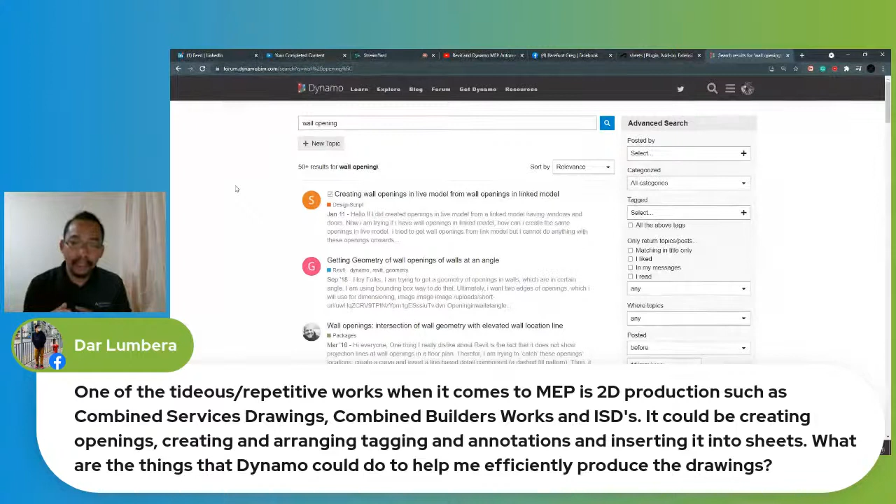That's the best way. So again, you go here, download all the script - wall openings, how to convert doors into wall openings is already here. And then you just have to practice and start working with Dynamo. So I think that's my answer to the question.

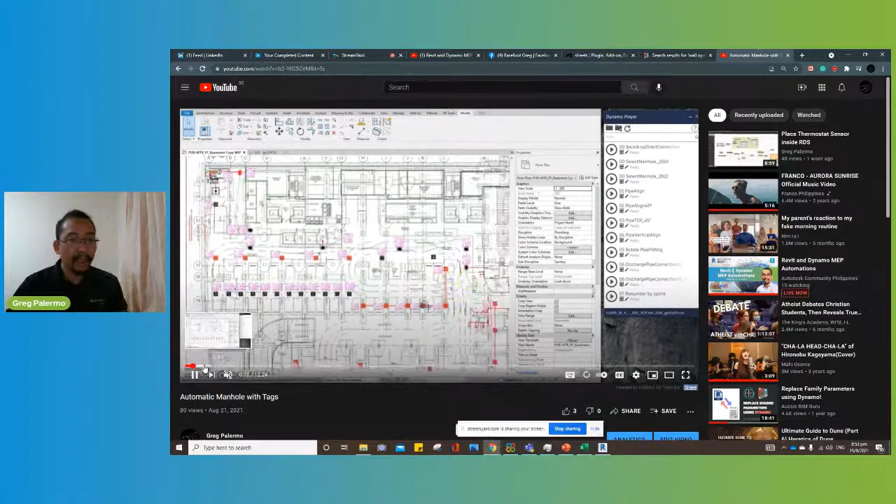Where is it? This one. So I've already discussed this one before. Maybe next time we will focus on one topic. Maybe the whole session will be scripting only, because it will take time.

Example, for this one, to auto size or auto create a sloping of the manhole. Okay, let me try to check that one. See, plumbing fixtures.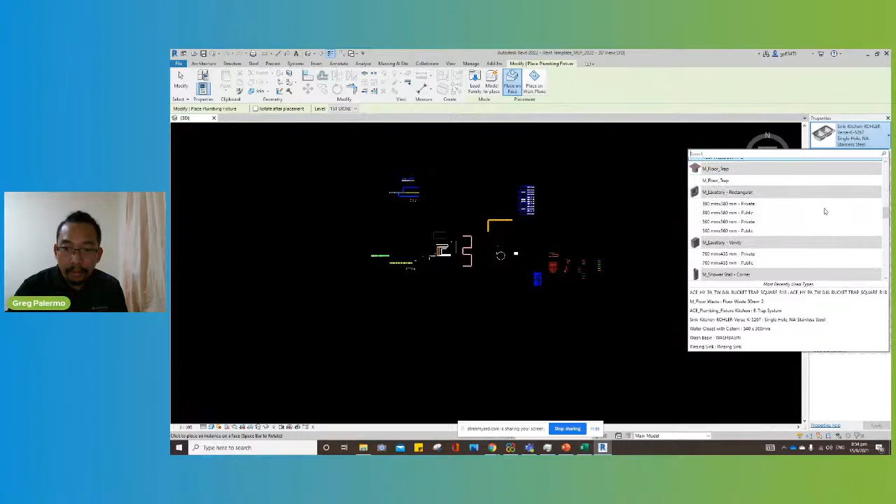Wow, okay, open. Okay, I think we can extend a little. We just open this one. Architect and close. Open.

So the next topic will be this one also. I created this one personally, so I'm extremely happy with this one - a manhole automatic pipe slope. So it will auto give you the invert level, top level, and then the depth also, and then the pipe slope automatic. So no need to do it manually.

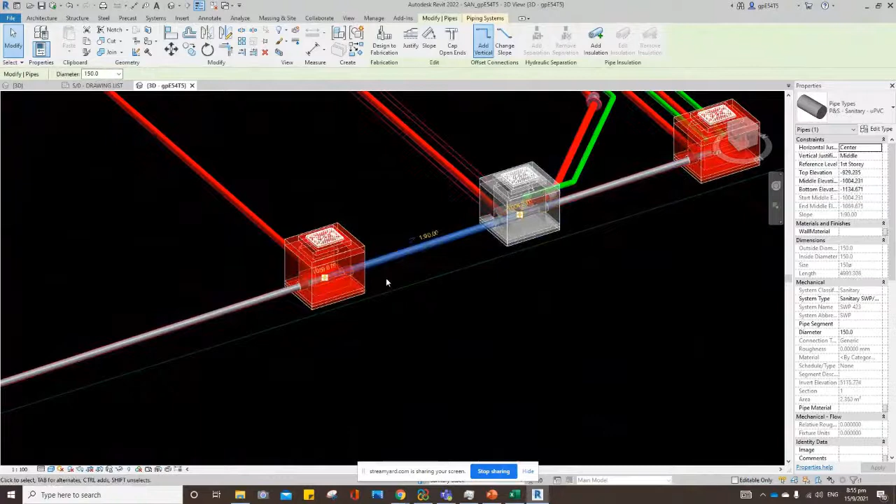Manual. Okay, I will do this one. Actually, this one is my actual project. So okay, let's just sample this one. As you can see here, this one automatic manhole, perfect 1:90 slope here, and then the depth also will be automated. So let's run Dynamo.

Project browser. This one.

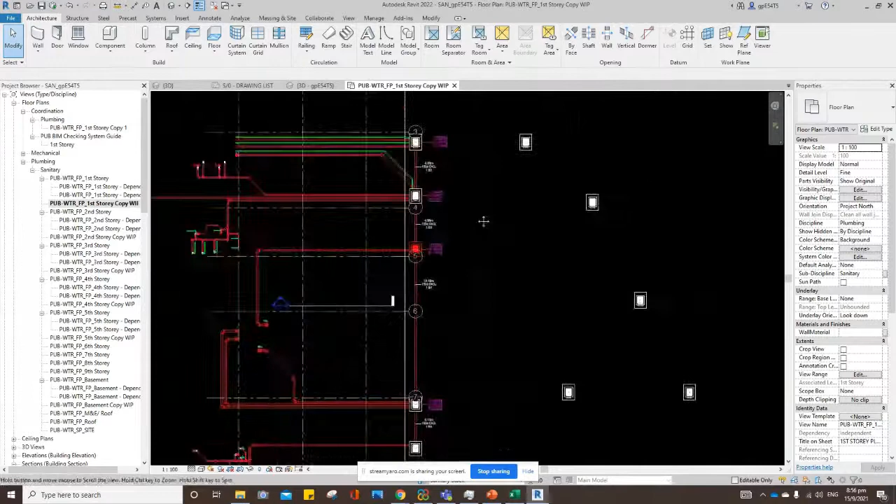So again, all this information, this is a tag, this is not a text. So it will save time for you. Just select this one and then create similar. You tag your manhole, and then it's there. You have already. Okay, so anyway, let's run this one. So let's say this is your manhole going here, and then you have an extra manhole coming here.

This one also. Okay, so you go to 3D, select this one, close this one. Okay, so this is our first manhole. So let's say this is your 750.

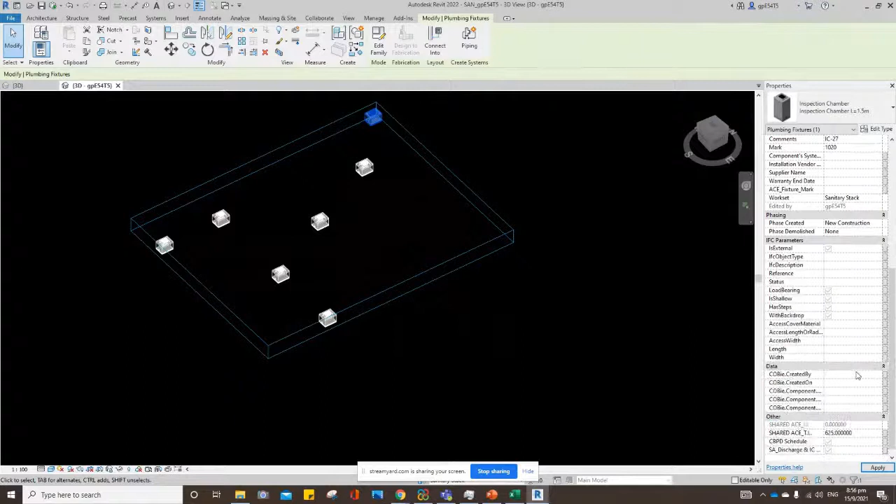So Dynamo manage, I think I use the Dynamo player for this one. So the Dynamo player is much cleaner, smaller, so you don't have to open the whole Dynamo page. Select here. Personal, presentation, Dynamo, sanitary, pipe, manhole. Okay.

So select manhole, you just edit this one. Select the first manhole, select the second manhole, so this one will be first story. Okay, so I think it's correct. So just play.

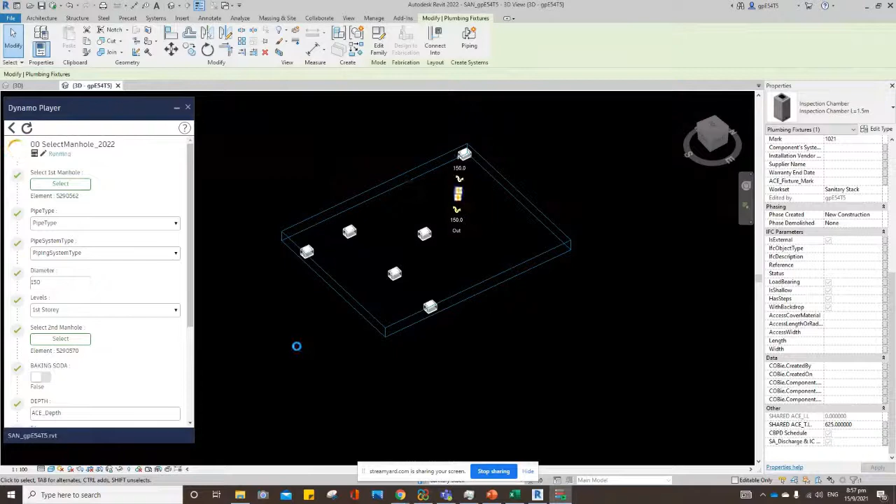So it will auto create the pipe. So this is 1:90, the depth also is changed already. Before this one is now 8433. And then let's just continue this one up to here.

Select again the first manhole, select the second manhole, play. Okay, so it will rotate. Select this one. Select the second manhole, first manhole. Play.

And then select this one, first manhole, second manhole, play. Select the first manhole. So once you have the script, no. So this script, I did not create this one overnight, no. I created this one multiple upgrades, developing, research also.

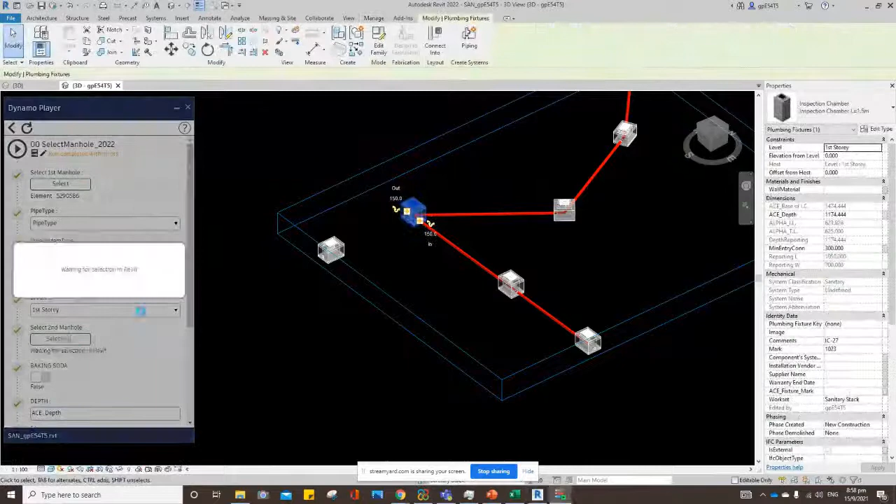So select this one and then select this one. So it will make your working process much easier, right? So anybody, if you have the script, no, you're happy, you can work efficiently. You don't have to calculate manually, the labor process, type this one.

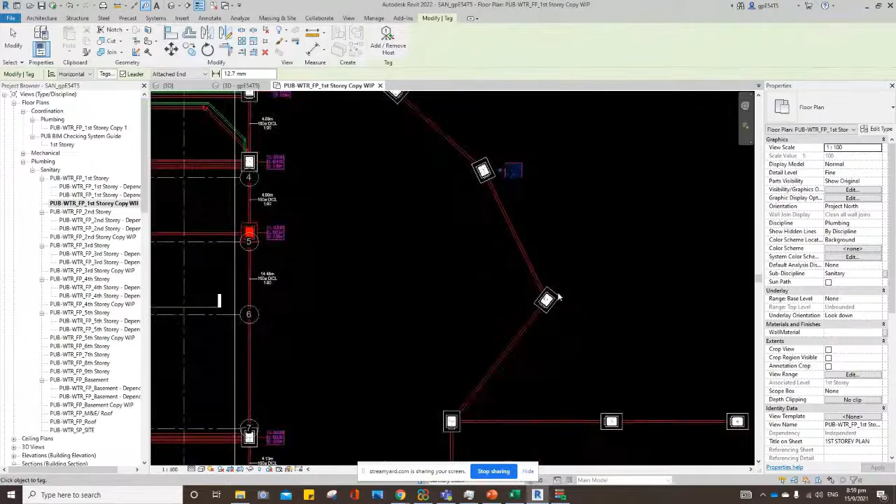So if we go back to the floor plan, this one, and check the tagging, so it will tally, no, 624.25, this one 624.16. So just click this one, click, click, click, and then for the pipe also the same. That's the length of the pipe, the size, and then the sloping.

So let's say you want to change the sloping. This one is 1 is to 60, 1 is to 70. You can also, so you just go to the scripting here. You change this one to 80. All right, take the first manhole, second manhole, and watch also, it will change this invert level. Play.

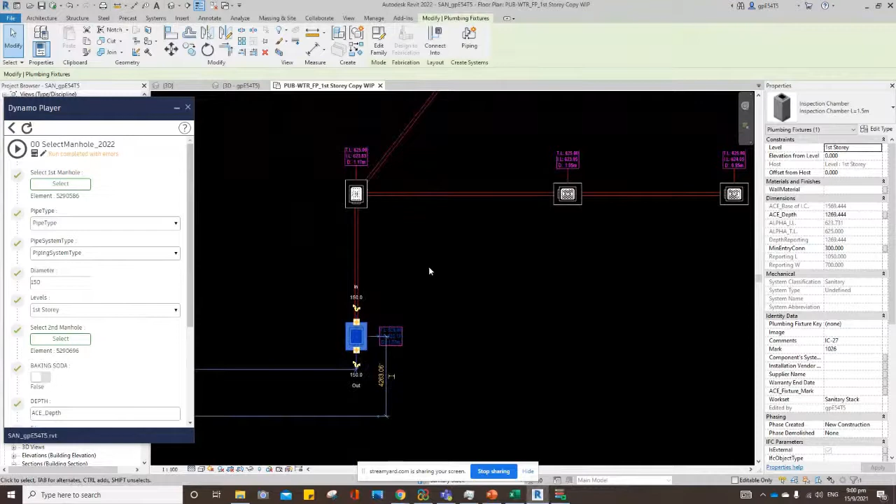So it's now 623.73 because you changed the slope. Of course, you change the depth also. So select the pipe, that's it.

So it's not that this one. So if you go back here, I have also more scripts here. So direct connection, align. So actually, go here in 3D. So let's say you have pipe here, slope up, this one, and then let's say this one is here, little above and below.

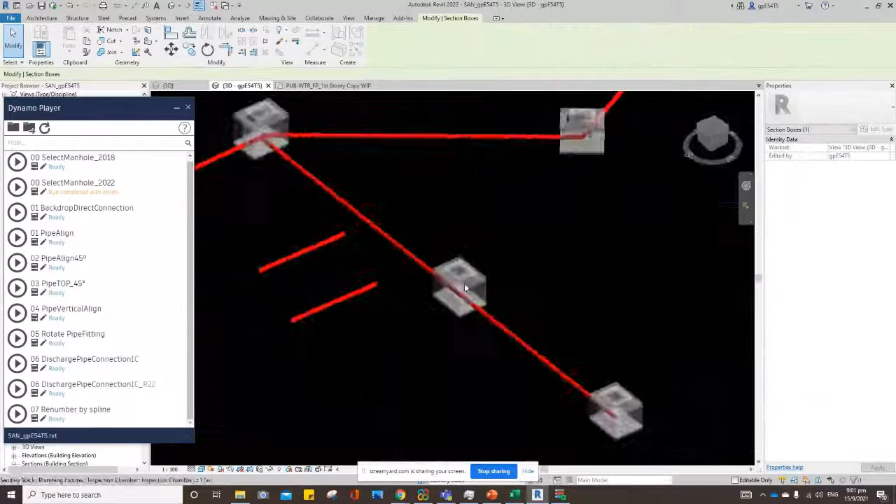So normally in 3D, you cannot align, no, in the center to center. You have to go to the section to do that. So just select this one. So I think maybe next time, no, because they have many topics here. So select the main pipe, select the branch. Watch here, this one, and then play.

What happened? I think this one I have to edit the script. Select the main pipe. Anyway, so maybe this one is next time, no.

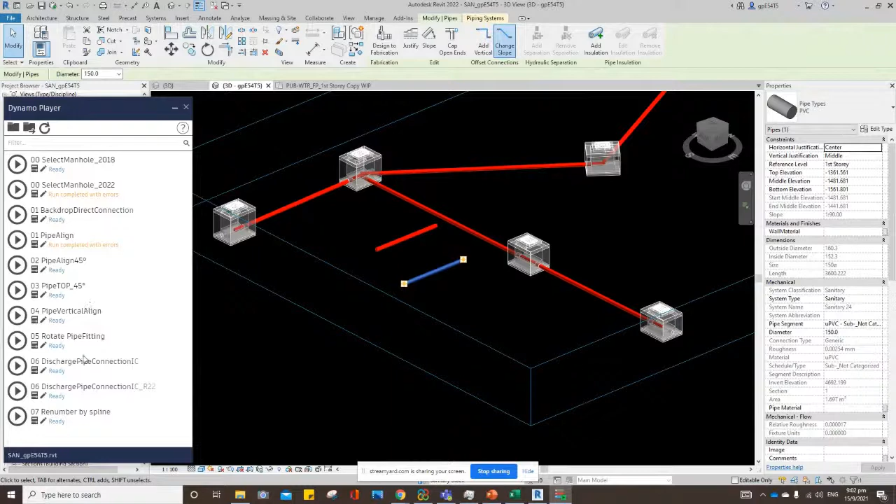But this one, all this script here, I'm using this one in my day to day, especially if I transfer again, working in sanitary. So we have the backdrop direct connection, pipe align with 45-degree before connection, pipe top align with 45-degree connection in the top also, and rotate also the fittings, discharge pipe connection. So I don't know if this one will work. I will just check this one.

Let's say this depth is 1,500. Oh, no, let's say 2,000. Backdrop connection, this one. Select the manhole, select the pipe. I hope it will work.

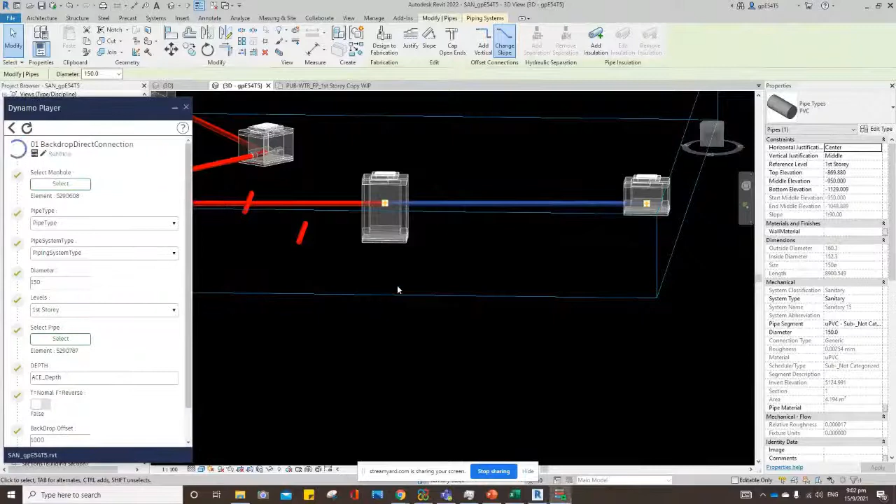Yeah, so you see this one, it will automate also, no need to do this manually. So if you want to change also, let's say I have here, where's it? That's the 45. If 90, you just delete this one.

And then select the manhole again, select the pipe, and then play. So again, you just trim this one. You cannot create a perfect connection. And then TM, so it's already connected. So this one is the backdrop connection.